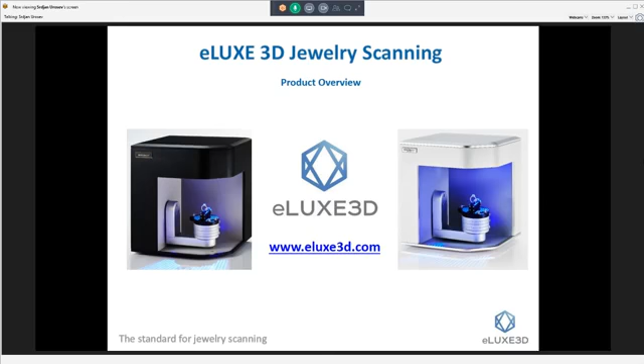For those not familiar with three-dimensional scanning, the two primary forms are laser scanning or structured light scanning. Laser scanners tend to have a sweeping red, blue, or even green line that's automated or sometimes manually operated with an external coordinate measuring machine, usually a fixed line that sweeps along the part, acquiring point cloud data which is ultimately turned into an STL or polygonal model.

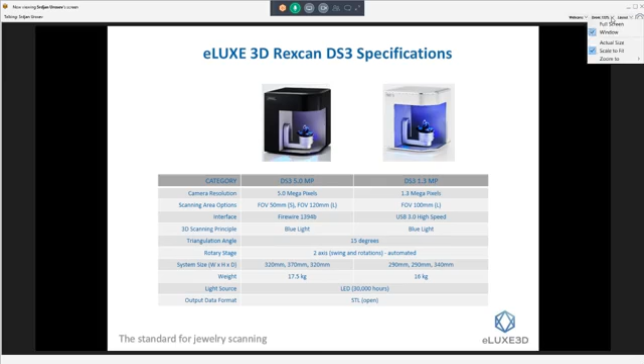Our technology is a little different as it works in a structured light fashion, so it's a megapixel-based system. It works just like a digital camera. Your iPhone or traditional digital camera is a 5 megapixel, 10 megapixel, maybe 40 megapixel system that acquires images in 2D. Our technology has the same principle and philosophy, but it collects images in 3D.

What that means is we're able to project a fringe pattern onto the object, and the two cameras collecting or looking at the fringe pattern define the resolution and gather the data in a three-dimensional fashion. So we don't have a lot of moving parts. The only moving part you'll see in the scanner is the platform that rotates and has a fully automated swing. You'll see this live in just a minute.

The two systems we currently carry commercially are the Rexcan DS3 Silver and the Rexcan DS3 Gold. The two systems primarily differ in resolution. The Silver system is a 1.3 megapixel, USB-based system, collecting 1.3 million points per shot. The DS3 Gold is the 5 megapixel system, defining a very high resolution, collecting 5 million points per shot. With that, you can see some of the technical specifications.

On the DS3 5-megapixel system, we've developed two versions: a 50 millimeter field of view and a 120 millimeter field of view. We initially had just the 120 millimeter field of view, and when I say field of view, I mean how large of an object the system can see within a single scan. So 120 millimeters is the maximum on the large field of view. We also developed a 50 millimeter field of view, a very high resolution system primarily targeted around high-detail objects, detail-rich objects such as engagement rings and high resolution stones with a lot of features. It's specifically designed for rings and very small objects within that 50 millimeter field of view.

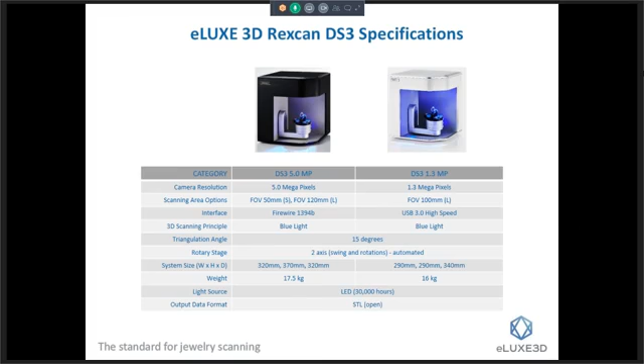One of the advantages our systems carry is an open STL platform, so we don't lock you into specific software that doesn't necessarily have digital models. This gives us the opportunity to provide a digital model of some precious stones or precious pieces that have a lot of history behind them.

Custom fit wedding bands are very popular. This process has taken a 3, 4, 5 day process down to less than a day. In 3 to 5 minutes, we're able to capture a perfect 3D model of an engagement ring, giving you the opportunity to build a wedding band with a perfect fit. It really saves on iterations of 3D printing and design, so it's becoming very popular.

3D heirlooming, or digital heirlooming, is another format of use for our technology. Old existing pieces that may have been passed down to family members within generations can now be replicated or stored in a digital format, since they have family history behind them. A lot of our customers are doing this.

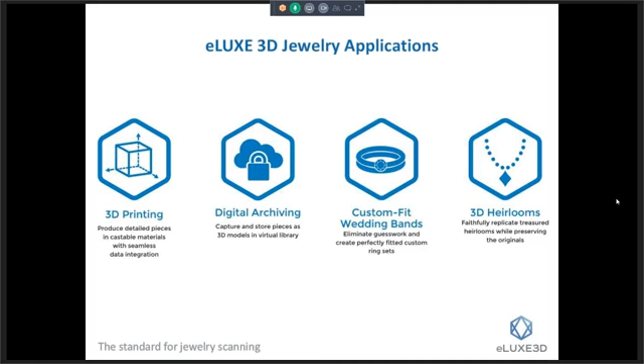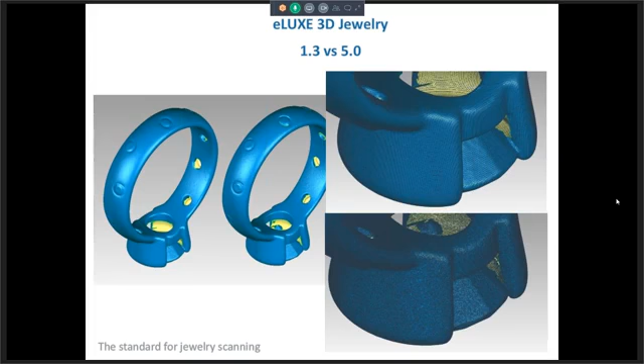To those of us who've been around the scanning industry a long time, this difference is clear. But for somebody just looking to acquire data quickly for template or design purposes, the 1.3 megapixel system is a great system. You can see the correlation between the two data sets.

Just a few samples of STL models created from our scanner. Everything you're seeing are basically triangulated and fully watertight models.

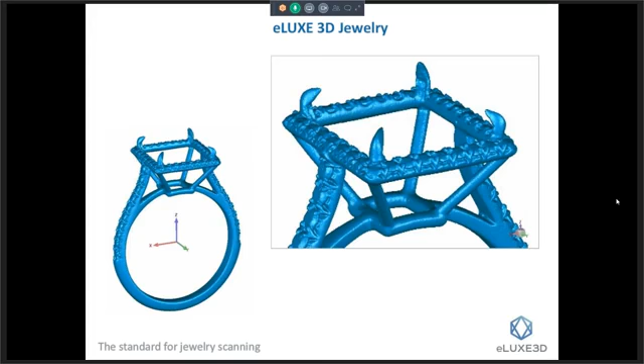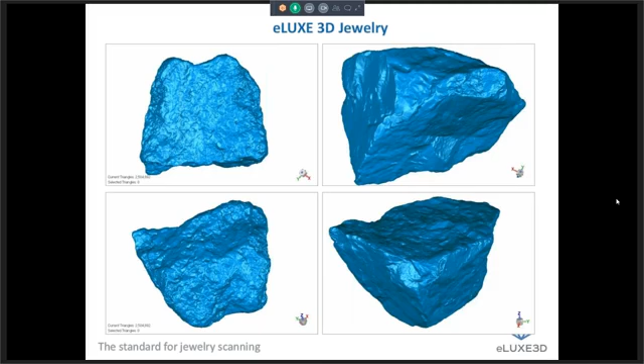These are actually just basic stones, but we wanted to show the capability and how much detail we're picking up. If you had an irregular stone that you needed to design around, we understand it's a very difficult process with traditional calipers and tracing methods, but we have the ability to provide a detail-rich model for you to work with in your CAD packages.

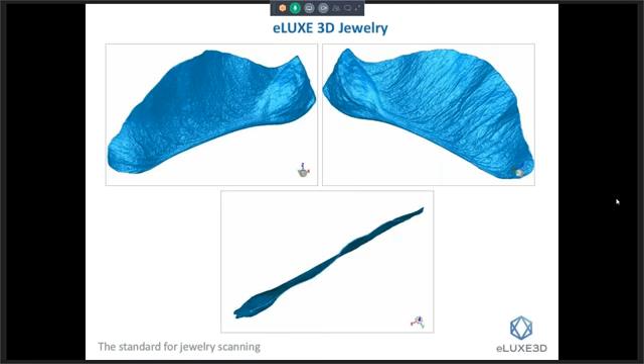This was a cool project we did for a local university. They just wanted to see if we could scan this helicopter leaf from a maple tree, to see what kind of detail we're able to get. That's showing both sides of the leaf, and you can see all the veins very crisply. This was done with a 5 megapixel, small field of view, 50 millimeter scan, giving you a real world scenario of the capabilities.

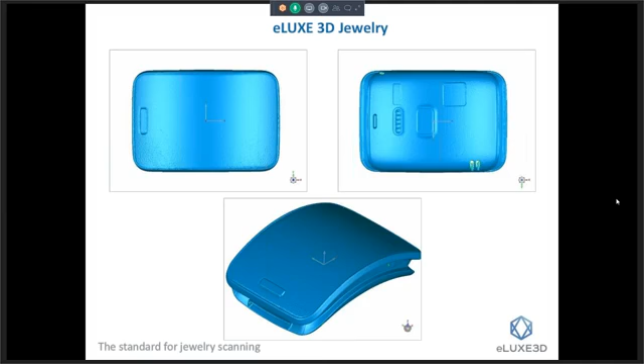So a lot of what we're talking about here is STL format-based. For our purposes at eLUXE3D, we are heavy users of Geomagic simply because we've been around it for a very long time. Geomagic Wrap in particular is a platform that we utilize for cleaning up STLs, for having the ability to fill in holes, extract features, and actually creating NURBS surfaces. It's a product that's been around for a very long time and has developed a lot of great tools for being able to work with high-resolution STL models.

A lot of our customers use a combination of ZBrush, Rhino, Gemvision Matrix, 3Design, a few others that are out there. But we want to put enough tools in front of you to understand what you can and can't do with the technology and what the limitations are. Because if you think about how much data we're collecting, millions and millions of polygons, there are certain CAD packages that are not designed to be able to handle this type of geometry.

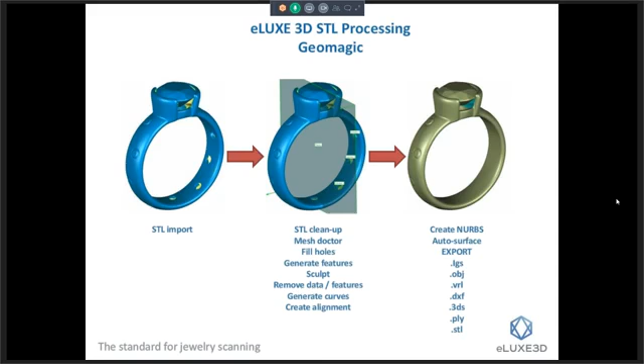So we're always working with our CAD suppliers, CAD vendors to improve on their processing side. But for our immediate need, our go-to product is Geomagic on the reverse engineering side and on the inspection side. As I mentioned, it has a lot of polygon sculpting and cleanup capabilities to get you that watertight model.

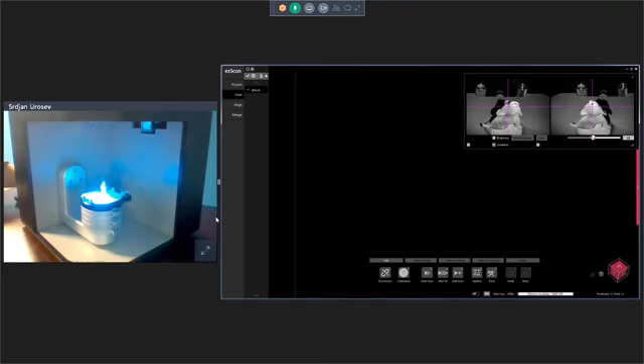Okay, we're back. Successfully was able to transition from one piece of software to another, so that's always a good start to the day. As you guys know, technology doesn't always behave perfectly, but you should be able to see a webcam showing the actual platform of the scanner itself, and in the background, depending on your layout, you can see our product in the software format that we're going to be using to collect the data.

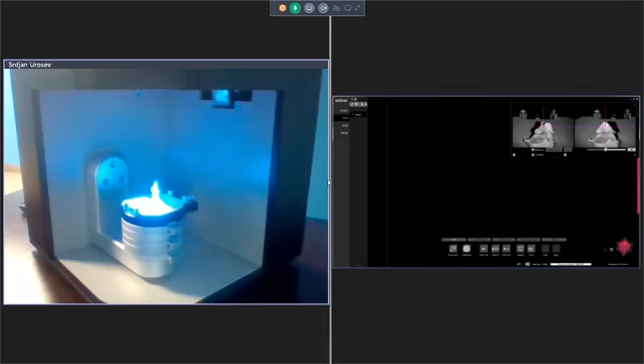So what we've done over the past couple of years is we've really focused on developing a software product and a hardware product that's very easy to use, very automated, that doesn't require a lot of technical expertise. EzScan 8 is a software platform that was recently launched in conjunction with the DS3 and the silver and gold systems, and we really were able to create a product that kind of follows a process.

So just to show you a little bit of the layout and how this software is actually developed, on our left-hand side we have basically our project tab, which is going to be our starting tab for starting a new project or opening up an existing project. And then we follow a process. We have our scan tab, align tab, and merge tab.

We really want to create a process flow that your technical people are using as you're walking through the scanning process. So anything within your scanning capabilities that allows you to acquire data would be under your scan tab. You can see this is a live feed. The left and right cameras are actually live right now. So if I put my hand in there, you can see that it's actually picking up the data live.

This little pendant that we're scanning is a little puppy. It's about an inch in height, so it's relatively small. It has some detail on it, and this is what we'll be working with today.

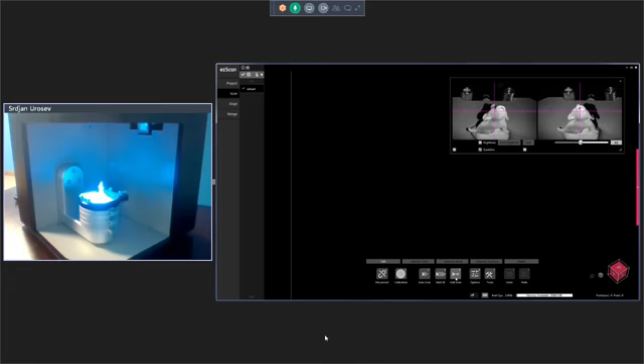We have what's called auto scan, which we're going to be running - it's just a string of macros. We have a next 10 button, which is kind of unique to our technology, where the software automatically calculates the missing areas in the scan and generates the next 10 paths. Or we have what's called add scan, which is just an individual scan. So if I click on add scan here, the system is going to move to a position that we're looking at currently, and it's going to take a single shot.

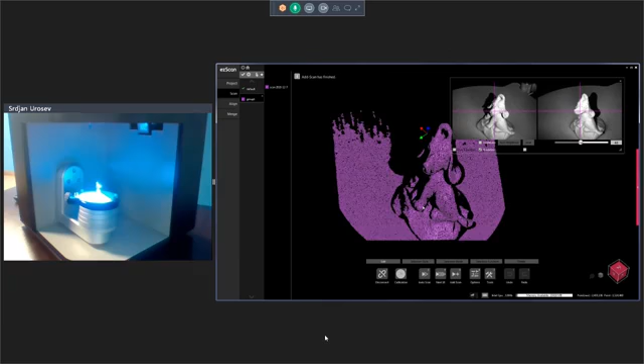And there's what we're kind of seeing on the screen from one orientation. Now you can tell that we've scanned some of the platform, the fixturing system we currently use, which is just some putty. The system does come with a ring jig and a full fixturing setup, but anything that'll fixture your object in a permanent orientation can be used to hold it in place.

Your object cannot be moving independently from the swing or the turntable. So during the calibration process, we actually create an internal coordinate system that's saved within the calibration file. So every time we move this swing, it knows its previous position and registers the data together.

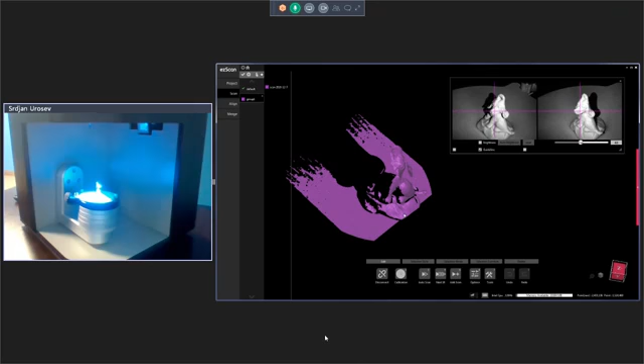One nice tool I like to use here to avoid scanning some of the turntable or the platform is what's called a clipping plane. I may be getting into some technical aspects of the software, but it's kind of nice to show. So I'll turn on our virtual clipping plane, drop it to right about there, and then hide that. Now as I run our macro, we're going to go through and delete anything that's below that plane, which saves time on cleanup and processing. So I'll go ahead and delete this group.

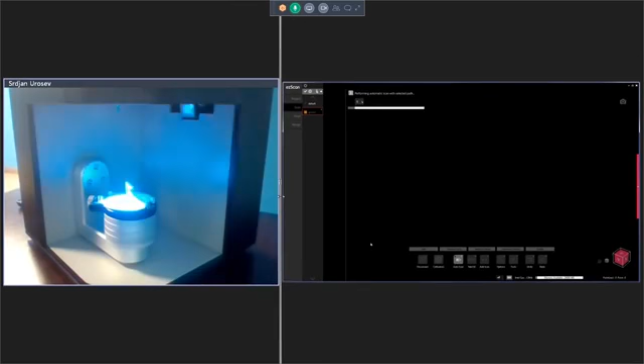Instead of doing an individual scan, I'm going to run through what's called an auto scan. This is basically a macro of about 12 to 14 positions we have for demonstration purposes. It's really hands-off - you set the part down, fixture it, hit play, and let the software do its thing. There's no registration that has to be done on the fly. Everything is done automatically as far as scanning is concerned.

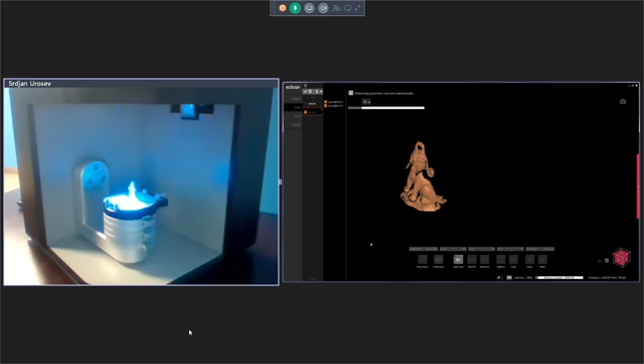Looking back on our left-hand side, we have a group 1 that's being created. As we're running this macro, the software automatically creates a group, and within that group you can see scans being populated - scan 1, scan 2, scan 3. It basically follows with a date and time stamp, but those names could obviously be changed if needed.

So we're scanning live right now, as you should see on the screen. This puppy is being populated very, very quickly.

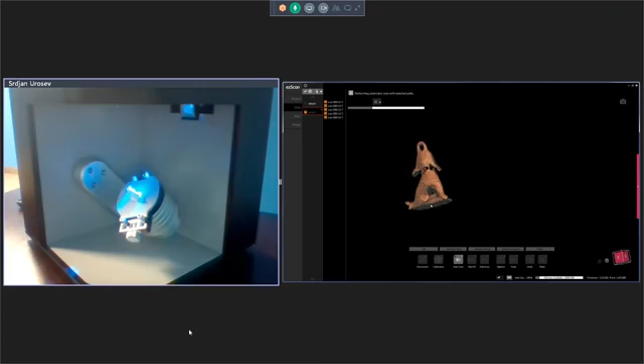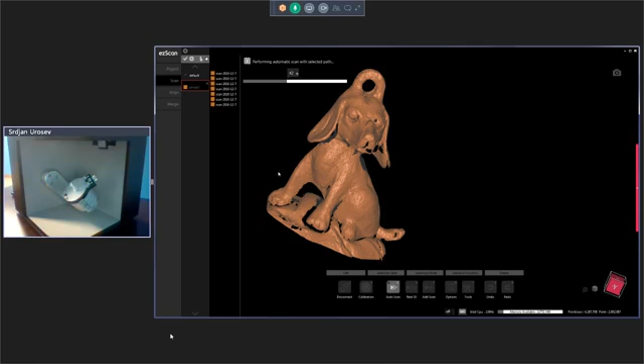I'm going to zoom in a little bit so you guys can see some of the detail. There are some waves in the actual design of this piece. The eyeballs are some sort of tiny little stones, but this detail you're seeing, this orange peel texture on the puppy, is actually on the object. This is not scan noise or something like that - this is actually detail that was designed into our piece here.

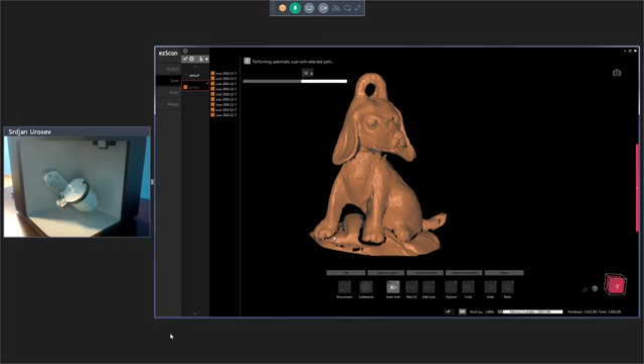So we'll let this finalize, and then what I'd like to do today is walk you through the full process and what limitations we have with the system, and what we need to do in order to have a full 3D scan that might be watertight, if you will. Because as you may know, with non-contact scanning, it is line of sight based.

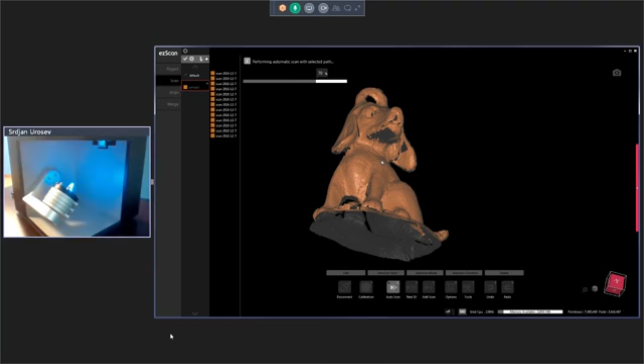What line of sight means is that what it sees, it will scan. So if I gently rotate this guy upside down, you can see we're going to have some missing data simply because the scanner can't quite see that location underneath. So some objects, some very high detailed rings that have pockets or holes not visible to the naked eye in certain orientations, the scanner might have a hard time seeing those. But with multiple orientations, we typically are able to gather most, if not all, of the data.

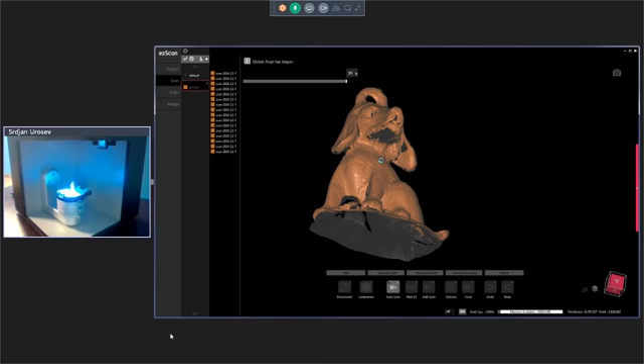But that's just something for you guys to understand - we're not seeing through objects, we're not seeing through the actual physical object. We don't see through stones. It is line of sight.

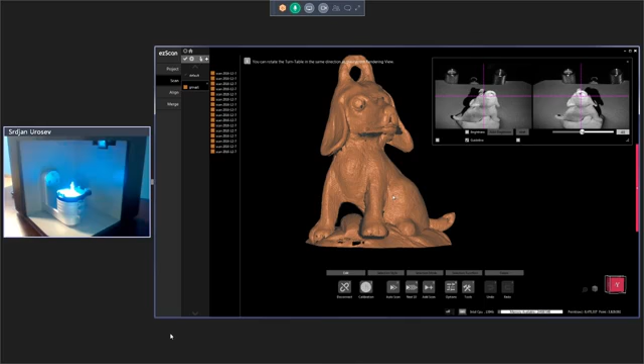So quickly, at this point, what I'm going to do is delete some of this putty, or their fixturing if you will. I'm going to turn on my edit command, use a Free Shape and Select, and just kind of select the areas that I don't need and delete them out.

And if I touch on a little bit of our actual part, our puppy here, it's okay, because what we're going to do next is flip this puppy upside down and gather up the rest of the missing data, and then walk through an alignment process.

So again, we're doing this live. There are no tricks here behind what we're doing. We just want to get you guys to understand the full capability of the product.

Very easy workflow. If you put down the product for a couple weeks and turn it back on, it's not something you have to reach for the manual. It's something you'll pick up automatically. That was kind of our key in trying to develop and streamline this process.

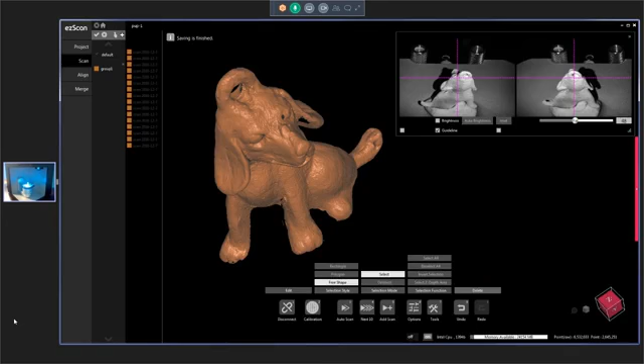I'm going to do a quick save as here, and we'll just call this Pup 1. I get in a habit of saving quite often, as you typically don't like to lose work, and in case there's some sort of a crash, you always have your file saved.

Okay, so here's what we're going to do now. We have our group 1, which has probably 85% of our scan, but we are missing a little bit of this guy on the bottom. So what I'm going to do is remove this platform from our scanner, from our jig, and take this puppy off. I'm really doing this live, so please be patient with me.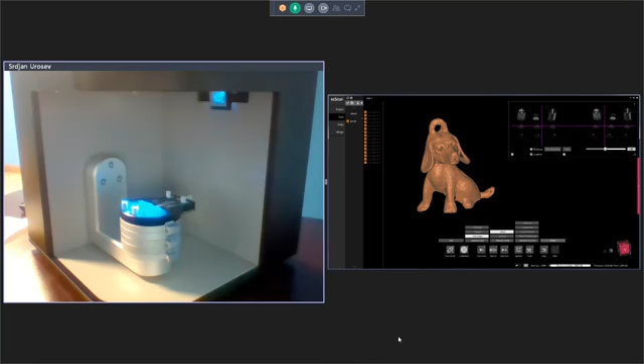We're going to just flip them upside down and fixture them back in. One thing I should have mentioned, which I didn't, we do add a little bit of spray on the object.

With scanning technology, if it's very shiny, reflective, transparent, or translucent, you do have to spray the object down a little bit, right? It kind of takes that shine and reflectivity off. It's very common with most scanning technologies out there. We have several different forms of spraying down the object, whether it's a 3D scan spray or a mixture of washable paint and an airbrush kit, and that's something we'll definitely walk you guys through as needed.

So right now I'm going to flip this puppy upside down, and I'm going to add just a little bit of spray to it. Obviously you won't be seeing that portion, but trust me, that's what I'm doing. Make sure I've got him fixtured in so he doesn't move. You might be able to kind of hear the spray in the background a little bit.

This spray that I'm using is actually a 3D scan spray developed by a company out of Germany called Helling. It adds about 3 to 5 microns of spray depending on how much texture you put on it. But it's a very, very fine spray that does not take away from the detail of your object.

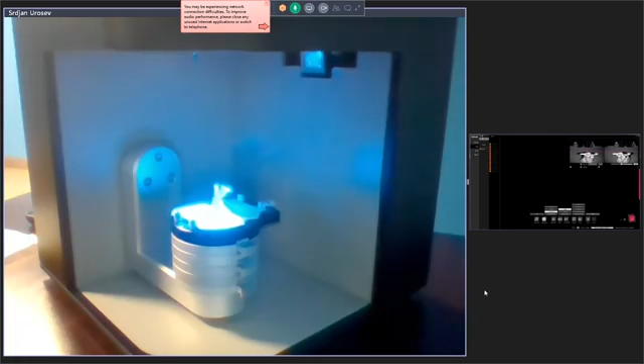So at this point, I'm just going to go ahead and click on the auto scan button. Actually, at this point, what I'm going to do is take one scan because I'd like to predefine my clipping plane again. In order to predefine that clipping plane, you want to have one scan on the screen so you can kind of see where you're trimming with the virtual clipping plane. Otherwise, you might be taking away from your object.

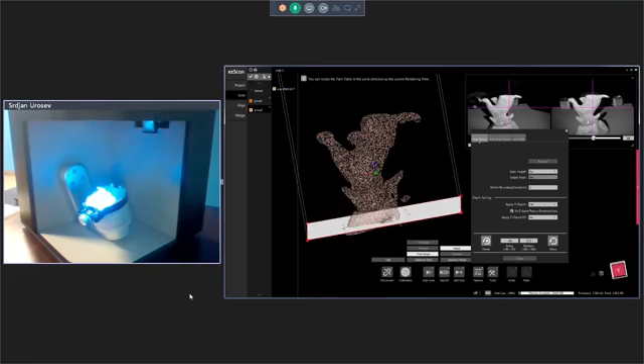So I'm going to go back into my options, turn on my clipping plane, and you can see that I can definitely bring this up a little bit. We're good there. I can delete group 2, and then I'm going to run auto scan, same macro.

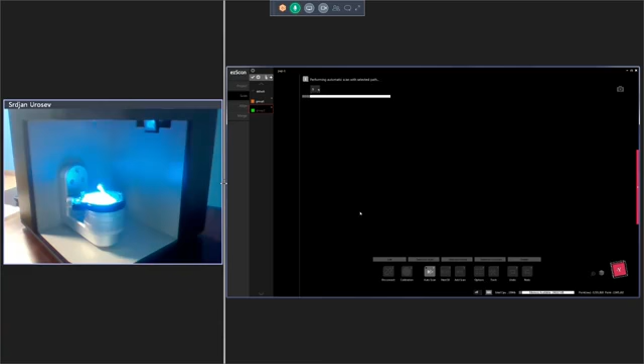So the macros are basically kind of embedded in the product. You can create your own macro, and all a macro is a string of positions, a rotation and a swing. It's an XML file that could be edited. It could be generated within the tools and options we provide, or it could be edited in just a notepad or some comma separated value format. But all it is, is multiple orientations and a swing in position. Once the actual swing moves, the scanner takes over and takes a picture.

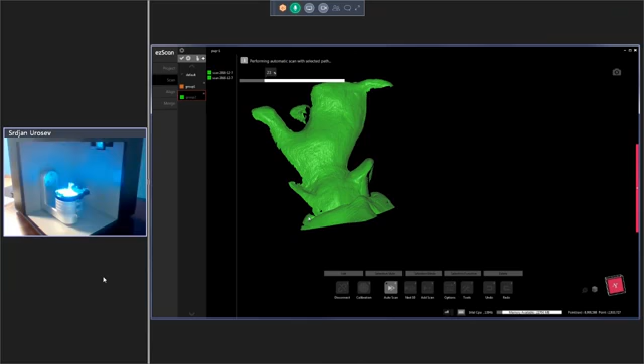And now you can see we're kind of filling in the blanks. I'm running the same exact macro as we ran for group 1. As you can see, on the left-hand side here, we have group 2 that was created, and all the individual scans that fall within group 2.

Our next step is going to be to take group 1 and group 2 and align them together. And this is something we're going to do in this product as well. So as soon as this is finished, we'll clean up some of the areas that we don't need, and we'll align them together.

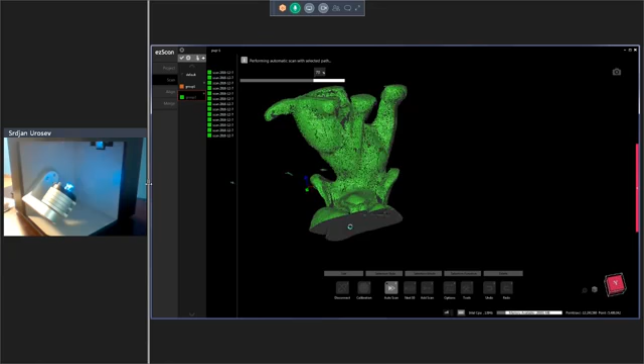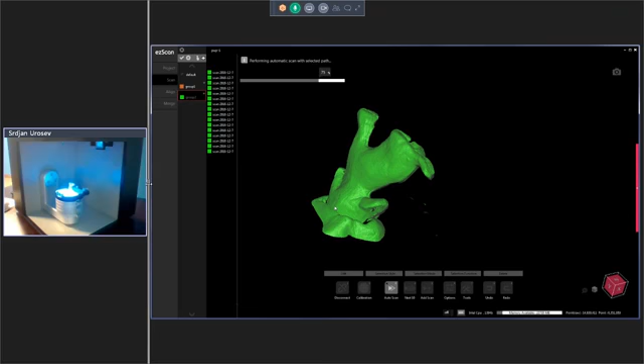All right, looks like we just finished the last scan. We're going through a quick global align. And there is our group 2 scan.

Again, I'm going to go into our editing and just delete some of this noise that was picked up during the scanning, whether it's the platform or some background noise. I am going to zoom in and nicely trim around this putty. And again, this putty is just one of multiple forms of being able to fixture the object down.

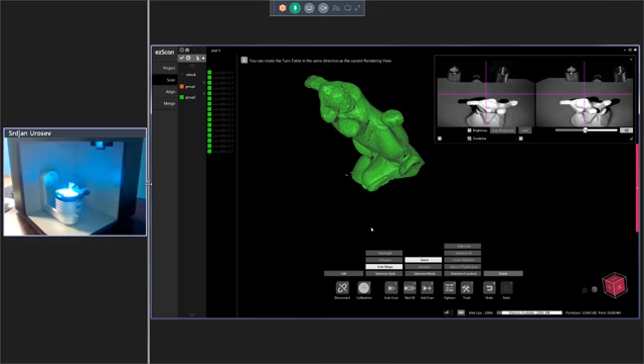Hot glue is used quite often. Our customers have developed some of their own fixturing systems. The system, as I mentioned, does come with a very nice ring jig. It's basically a mini vise with some rubber padding on the inside, so it doesn't deform your object. Again, the goal is just to fixture the object in an orientation that will prevent it from moving during scanning.

Okay, so now we have the bottom portion of our puppy scanned. To play it safe, I'm going to do a save as and overwrite the previous file. So we have that saved. Yes, we'll overwrite it.

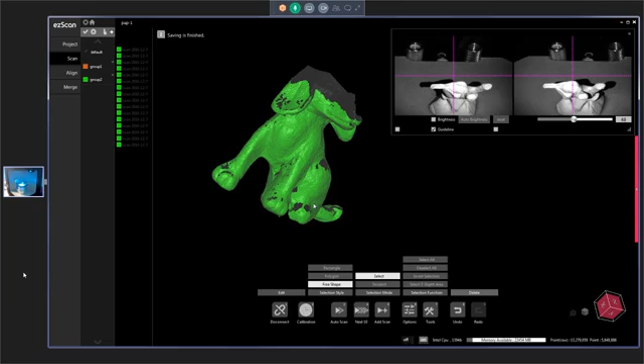Now that our scanning is complete, we're going to go to the next phase, which is our align phase. So as I click on the align phase, our cameras disappear. Now our icons down here at the bottom also change, and now we have a couple forms of alignment that we're going to be able to work with.

I'll go ahead and turn on group 1, so you can see that we have 2 groups of scans that are in different orientations. And then we have a couple different alignment options here: a 1-point alignment, a 3-point alignment, a manual alignment, and a global alignment.

These are very standard alignments that you guys may have seen in other CAD packages. So 1 point is most common that we use. It's a very nice form of alignment - you just click on one common point and the software will take over. 3 points will allow you to pick 3 common points. Manual alignment will allow you to just rotate one of the objects on screen manually.

And then a global alignment is basically a curvature-based global registration that we'll do as a final step to ensure all the individual scans are globally registered.

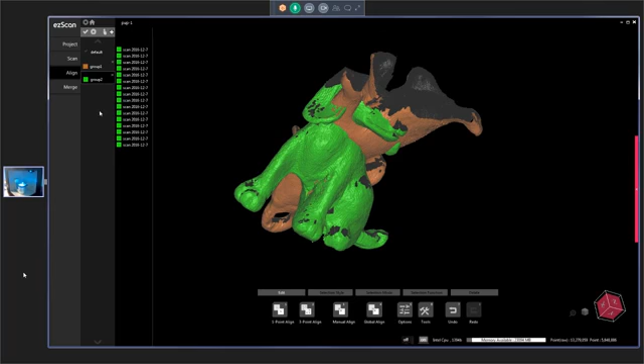So what we do here is click on the group that we want to move. I'll make group 2 as my movable object. I'm going to click on that, and I'll click on 1-point align. This breaks up our screen into 3 orientations.

We have our blue, which is our movable object, in the upper right-hand side. We have our white model, which is our fixed model, in the lower right-hand side. And then on the left side, we have our blue and white showing us what the actual alignment is going to look like when done.

So with the 1-point align, the only thing you have to be concerned about is that you have these objects approximately in the same orientation in 3D space. So I basically have the puppy approximately aligned in the same orientation in both views here, and we're going to click on one common point. So I'm going to click on this little neck area here. This point is approximately there.

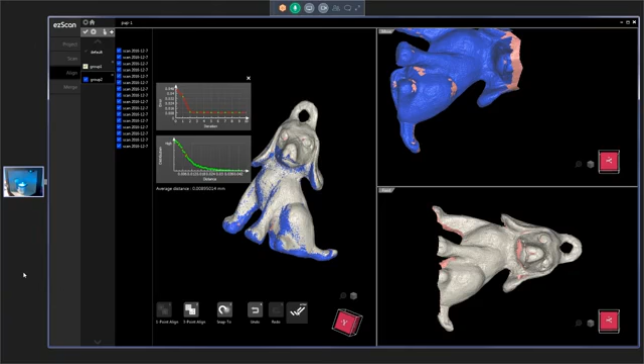The software takes over and looks for the overlapping information, and if you can see on our left-hand side, based on our view orientation and the common curvature between the two, it snaps them together very nicely. It gives you a distribution chart here, giving you an error and the distribution deviation, how much the actual objects have moved when aligned. So we're within about 8 microns as the average distance along all these scans. We'll click enter, and yes, we want to apply those changes. So now if I look at my 2 groups of scans, they overlap quite nicely.

One final thing I like to do is a global alignment. So we just did an alignment based on individual groups. I'm going to click on this little finger up here, deselect all, and actually I'm going to say select all, and then click on global alignment.

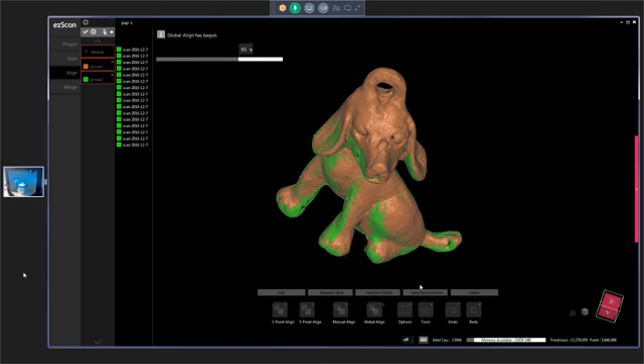What global alignment does is take over all the scans on an individual scan basis and do a final global registration, kind of bleeding through in case there was any vibration, or in case I bumped the scanner or bumped the desk or something of that nature. It just tightens everything up.

So you can see that we went from approximately 8 micron distance down to about 3 to 4 micron as the average distance between scans. And you can see the colors, how they bleed through in a format that tells me this is a very good registration and I'm happy with it. So at this point, we're going to go ahead and save this again.

And then we're going to walk through the final step, which is our merge. So we're going to go to our merge tab. Merge is basically exactly what it states - we're going to merge these objects into one individual STL. Right now, they are still all based on 2 groups with about 15 or 16 scans in each group. I'm going to go through and select both of these groups, click on merge object, and then we have some tools here to work with.

Some of the tools we predefine are strictly based on our merge resolution and file size. File size is linked to how large of an STL you'd like to have. So the way this works, my default merge resolution, or the triangle edge length or point distribution, is about 25 microns, which is pretty good. Most printers, you guys are printing at about 10, 15, 25 micron settings, so that's pretty good. Our output file size is going to be medium.

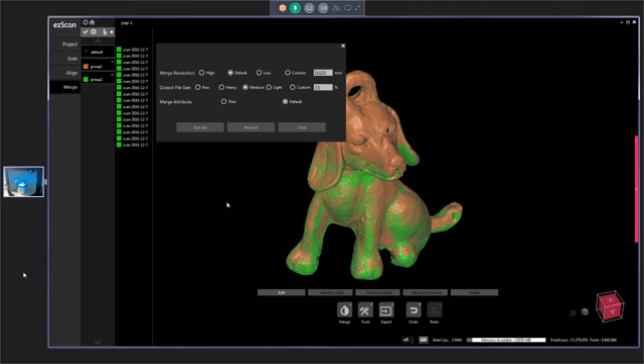So we're going to decimate this from approximately, if you look in the lower right-hand corner, 13 million points - we're going to get rid of approximately 65-75% of that data. So still keeping the resolution of our data intact, not losing any detail, but really minimizing how large our file size is. You can input a custom value here as well based on percentage, but we'll just go with default and medium. We'll go ahead and execute that, and we'll say yes because we have saved this.

Now it's going to take a minute or so, or hopefully less than a minute, to merge this together. In case you guys are wondering what kind of machine I'm running on, I have an off-the-shelf HP ZBook with Windows 7 with a Core i7 processor. We do need some horsepower between a laptop or a desktop - we run on Windows 7 or Windows 10. But something off the shelf, that you typically run your CAD system on, would be sufficient to run the scanner. Graphics card is important, good processor is important, and the RAM distribution is relatively important.

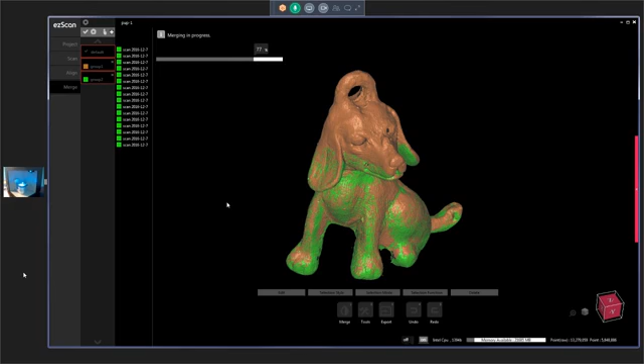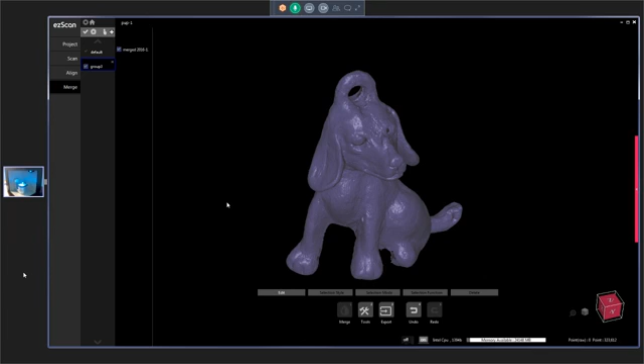One reason I like to save the files as I go along is obviously unexpected crashes every once in a while do happen, so you want to make sure you preserve your work. Second, once you finalize your alignment and go through the merge step, you can see that now we just have one group and one file - we've merged all of those scans together. And you can no longer go back and add scans.

So we're actually now going to export out an STL or an OBJ file in this phase. If you ever wanted to go back and add additional scans, you really have to do it on the raw metadata file, which is an extension of MDT. That's our raw file format, and that will allow you to add additional scans, additional orientations.

So with file management, as our customers get familiar, they typically save the raw file format, export out the STL file. Once they're happy and working on the STL file within their downstream process, you can go back and delete the original file, the original metadata MDT file with all the raw information.

So in a nutshell, that's basically the process of scan, align, and merge. At this point, we're going to say export, and I'm just going to say export STL with OBJ, PLY, a couple different formats. We'll drop this on the desktop again. And that will kind of bring us to an end of the demonstration.

There are additional tools that we didn't cover here, some advanced tools like creating your own macro settings. We do have some decimation tools to walk through some mesh repair tools, smoothing, deleting of clusters, decimation, manual hole filling. So we do have tools that will allow you to massage the data or clean up the data once the scan is complete and once the merge is complete. But it's just part of some of the advanced training that we'll walk you guys through in the future.